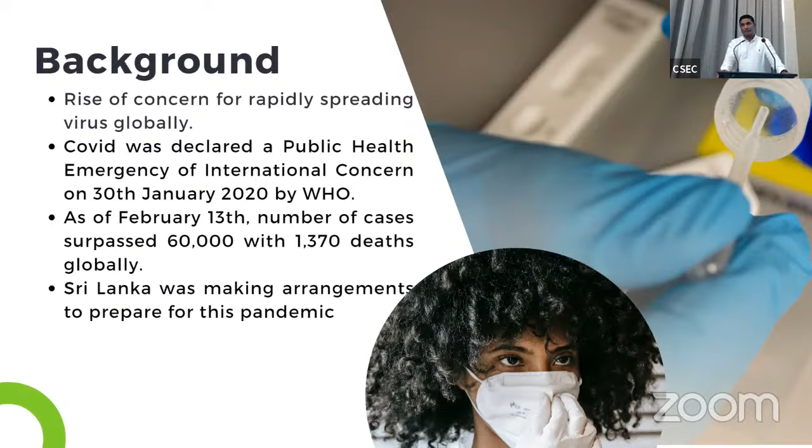So before going to the detail, I would like to give some brief background about the project. Then you will get a better idea of the project subsequently. When I talk about the background of the project, if you can recall your memories to 2020, you know what happened to our country, not only the country, the entire world. We faced the consequences of the pandemic situation due to COVID, and as you remember, all the sectors, including private sectors, collapsed.

Actually, we didn't know what to do, where to go, what to eat and what not to eat, something like that. The instructions came from government sectors and various organizations, but today one, tomorrow different instructions. So basically, almost all the sectors collapsed except the health sector. Fortunately, the government and other relevant organizations like the World Health Organization gave maximum support to our country to manage the situation. So somehow, thanks to our health sector personnel, we managed the situation up to a certain extent. But there is a limit to anything. So the health sector also came to its maximum capacity.

So this was discussed at the highest forum in the country, and the main problem was infrastructure development. They had the medicine and the associated medical equipment, but unfortunately, due to the lack of infrastructure facilities, management was very difficult. As you all know, as per WHO standards, we have to nominate a reference hospital. So in this context, the government nominated the IDH hospital as the reference hospital in Sri Lanka. So all the critical cases and crucial situations were handled by the IDH hospital. But the problem was with the isolation facilities at the IDH hospital.

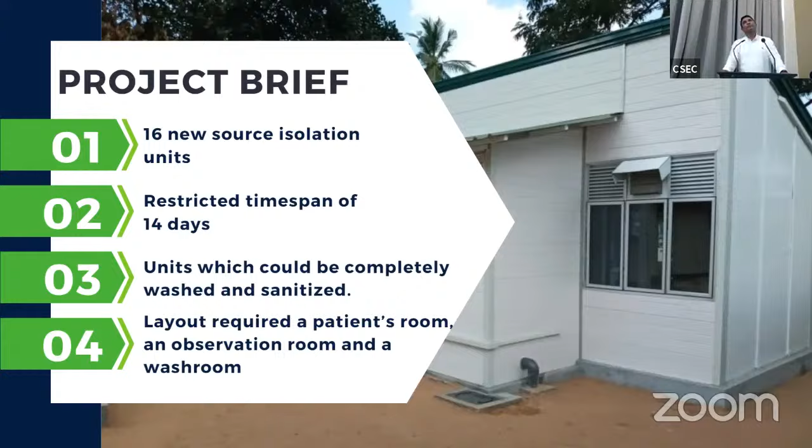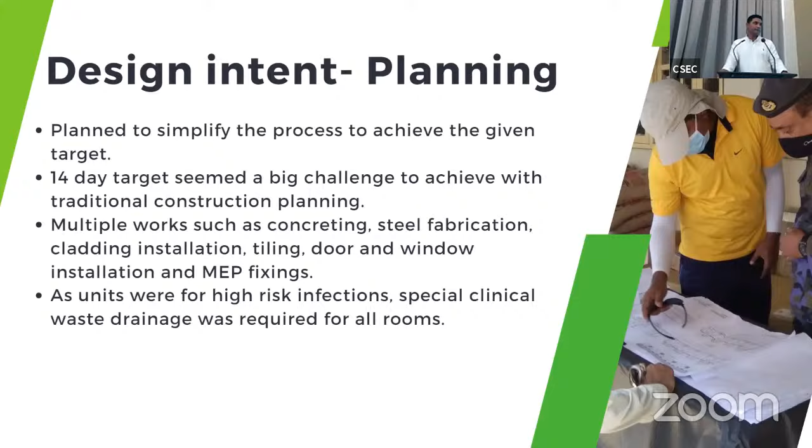But finally, I invited them to come to my design office for the planning of this project. So on the same day, in the evening, the IDH hospital director and other officials from the health department came to my office, and they gave so many proposals, and we evaluated them. We could accommodate all the proposals, but the problem is the time. It's very difficult to construct that facility within 14 days. So finally, we decided to do a composite design for this.

And the other problem is the material. You know, the entire country was in lockdown. We couldn't purchase; even crisis purchases we couldn't do at that time. So then we planned with the available resources within the Air Force, that means the materials available at our stores. So we did a survey. Then we found that we had some remaining components of prefabricated buildings available at our stores.

Then we did a market survey. One of our registered suppliers agreed to give color bonded sheets. That is actually corrosion resistant color bonded sheets, zinc aluminum sheets, imported from Japan for other projects, but he was willing to give them. So now we had some kind of material in our hands. So we tried to accommodate this requirement through composite design, that is basically cement masonry, the cladding and the steel work.

So likewise, we planned our proposal. In this project, the other factor is they need 16 rooms. Each room consists of the patient area, an attached toilet, an inspection, observation and treatment chamber and a corridor. The other thing is it should be washable and sanitized every 24 hours. So the tile floor is a mandatory requirement. It should be washable. And exhaust fans and other associated

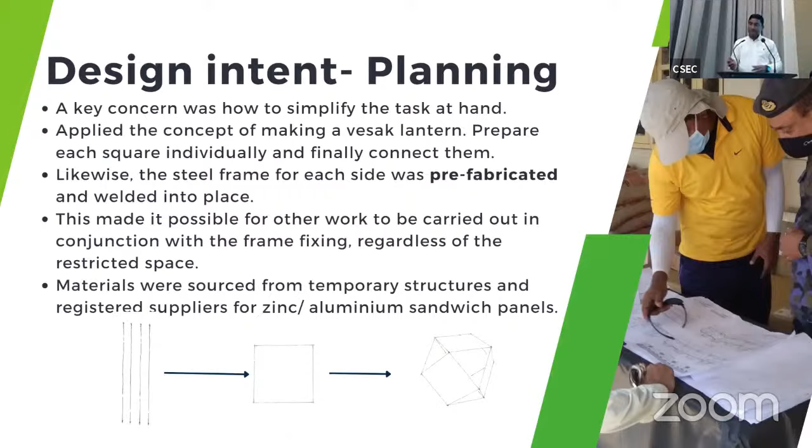So the next step is appointing the project management team and the structure. The project manager is myself. Then I appointed 5 engineers for this task. The first engineer is responsible for site clearance, demolition of the existing building, excavation, and foundation. The second engineer is responsible for prefabrication work and assembly. The third one is material supply and source management. The fourth one, finishing and landscaping. The fifth one, MEP and commissioning of the building.

Actually, this is a very confined and very restricted area. Due to lack of space, we can't build the 16 rooms in a line. So there is a dog leg, and also an abandoned existing building. So first we have to demolish that building. So likewise, we planned. To each engineer, we gave 4 supervisors, 2 safety officers, 2 welfare officers, and skilled manpower according to their tasks, trained under the various disciplines in the civil engineering field.

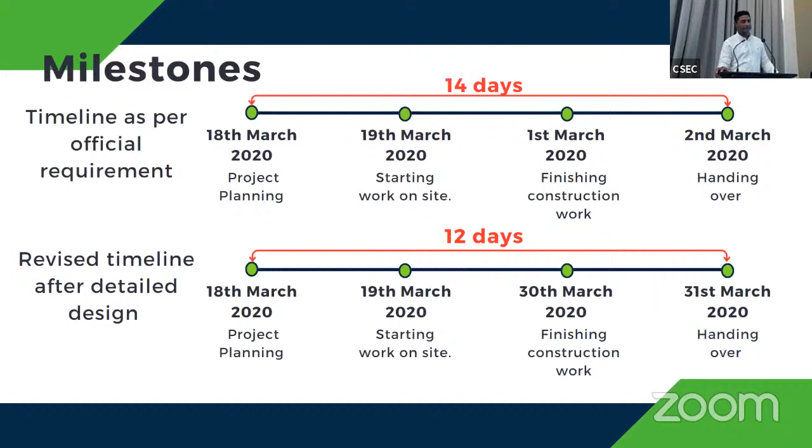So I know that if we plan for 14 days, it will end up with 16 days, with my experience. So again, I discussed with my team and we restricted it to 12 days. We revised the program in 12 days. But somehow, finally, we completed this project within 9 days. You'll be surprised how we did it.

So I would like to tell you how we did it, day by day. The first day, we mobilized. Mobilizing means we shifted approximately 125 people to the site, and we made the temporary shelters, toilets, workshops, kitchen, and storage area. The storage area was also very good because we got a ground. So we erected some temporary shelters for the workshops and storing of items, and other things were stacked in the open ground.

Then we started the first wing on the first day itself: the site clearance and leveling, then setting out of the building, then the excavation and backfilling, foundation and concreting, steel superstructure fabrication, and floor concreting. In parallel, we fabricated many structures, components, and elements in our workshops as well, and transported them to the site, which was under the stores management engineer's responsibility. Then for the second wing, we demolished the existing building, cleared the debris from the site, and started site leveling on the first day.

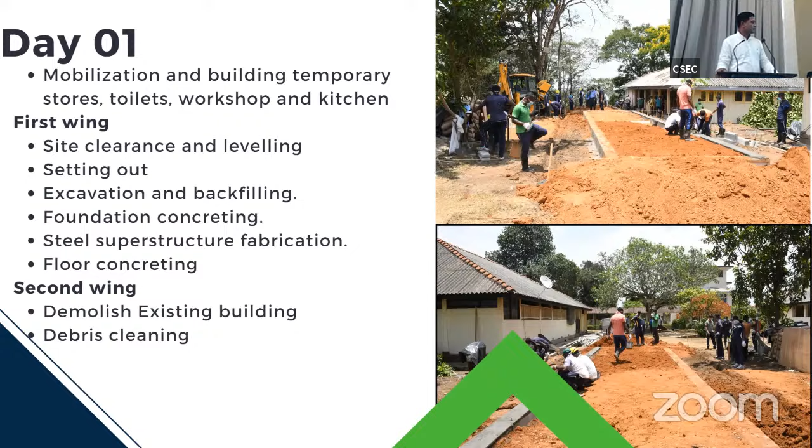These are some of the photographs pertaining to day one. You can see, in the corner one, the concreting of the floor. The following day, at midnight, we did the floor concrete of the first wing.

Then on the second day, in the first wing, we completed the balance floor concreting work and erected the prefabricated steel superstructures. Even while we were doing this, certain items were missing because some elements were still being fabricated at the workshops. So we had to use some jack systems, common sense, and our engineering experience. We just erected that component. You can see in the pictures the concreting is going on, but the steel erection is going on in the same area.

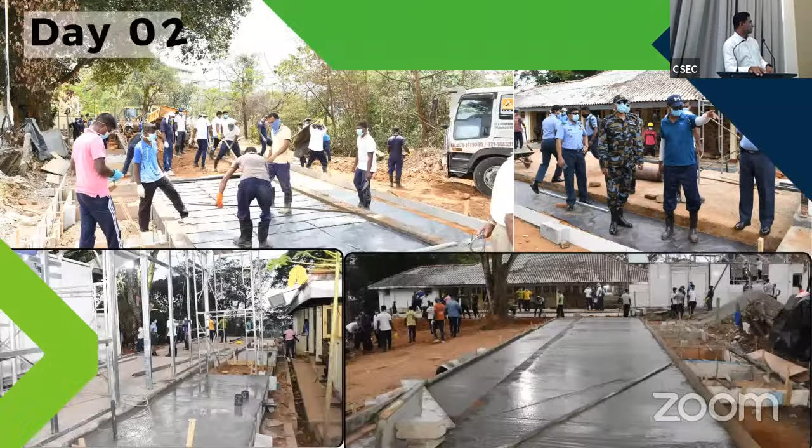And in the second wing, after demolition of that building, we carried out the setting out, excavation and backfilling, foundation and concreting work, steel superstructure prefabrication, and started the floor concreting. So this is day two work. This is the floor concrete going on. Then you can see the erection of the first wing. Some small components are there, but not all, because we just erected the available components only. We were waiting for the balance. That's why you can still identify the shape of the building.

So this is day three work. We started cladding and roof work in the first wing, and the wiring and plumbing also started. And this is a hospital, so the wastewater line and all, we had to do it in a separate way, not like in residential construction. And in the second wing, the balance floor concreting work, erecting of steel superstructure, and cladding installation.

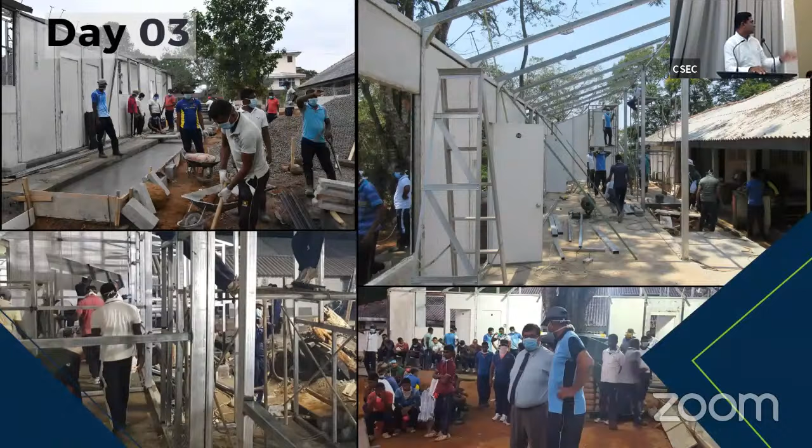In these day three works, you can see how many people worked, right? With a very restricted area. If you really analyze it with the square area, in the bottommost right picture, you can see how many people are there. Maybe it's tea time, refreshment time, but you can see, right? Because we detailed everyone with a task, supervised by the foremen and the supervisors.

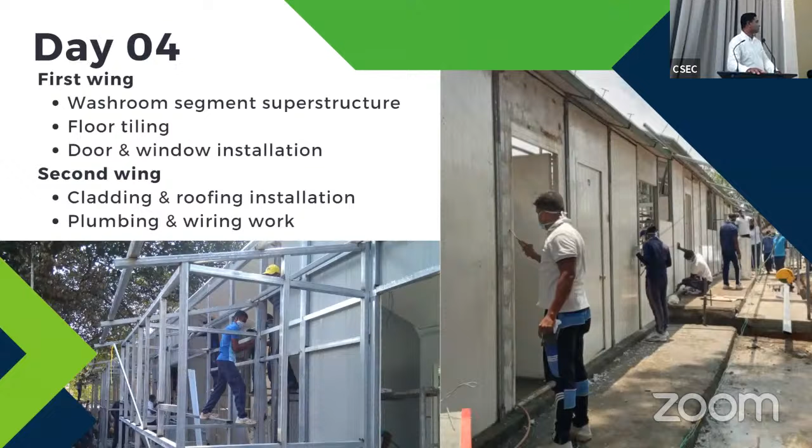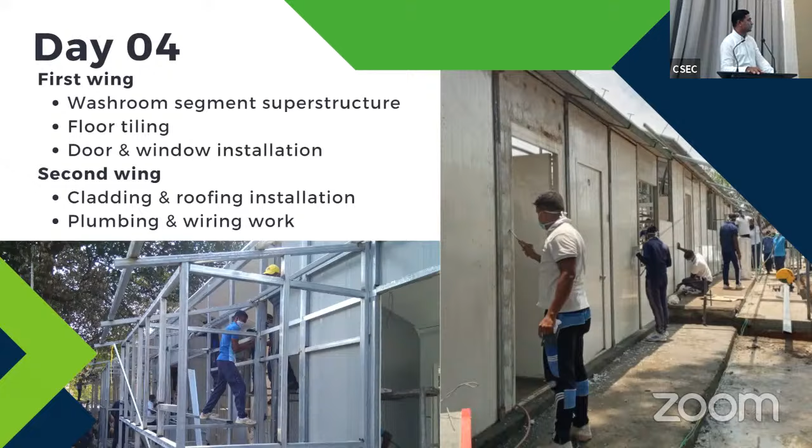This is the day 4 work. On day 4, we started the first wing washroom superstructure. You can see the washroom area in this picture. Then the floor tiling started. We tiled the wet area and the dry area. Then installation of doors and windows. In the second wing, cladding and roofing installation, plumbing and wiring work. So these are some pictures relevant to the day 4 work.

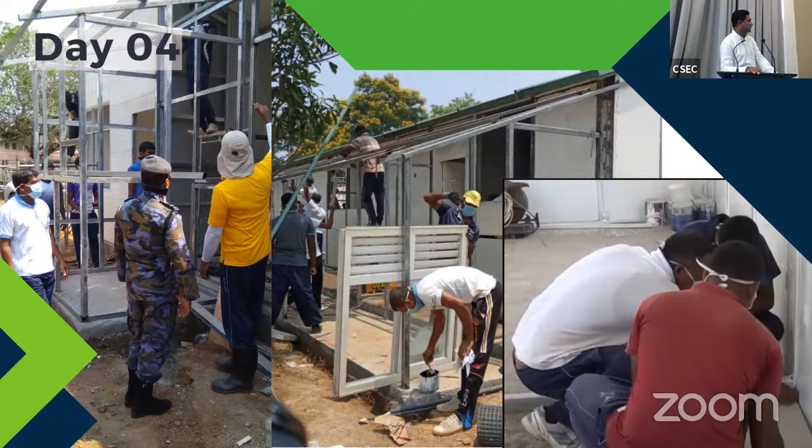This is day 5 work. You can see now the first wing tile floor. As you know, with construction, even in the crucial situation, they also wanted some amendments, some variations, and some modifications. So we entertained that as well as we could. So this is day 5. Day 5 work, the second wing.

So day 6. When it came to day 6, we completed the first wing: the final finishing work, electrical installation, fans, lighting, etc., the nurses' desk, and clearing and landscaping of the surrounding area. The second wing: washroom, cladding and roofing, plumbing connections, and floor tiling. So these are the pictures pertaining to the first wing. You can see the completed building, this is the patients' area, and the bottom one is the landscaping of the first building. For the walls, we had to clad both sides of the steel framework.

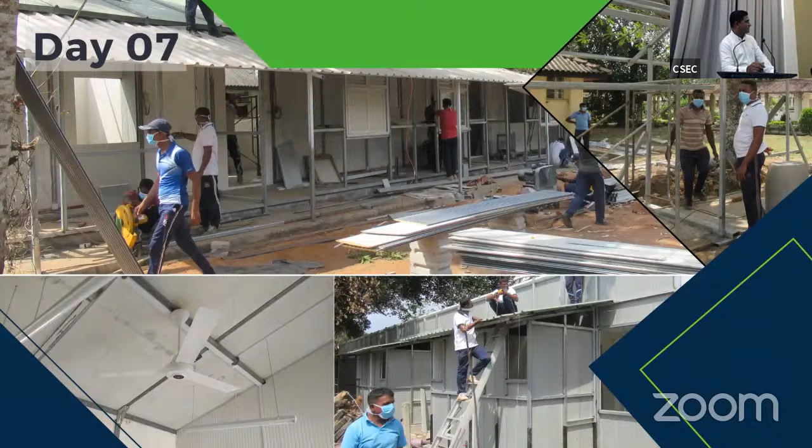When it came to day 7, the first wing was almost completed and the second wing maybe 70% completed, and finishing works started in the second building. You can see the pictures: the access path frame installation, landscaping surroundings, external corridor finishes, second wing, sewer connection finishing.

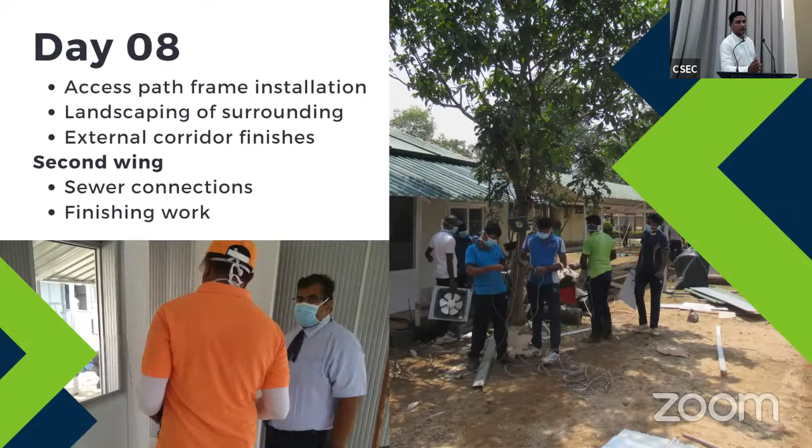and this is a night picture, the bottom one. So that is the finish of day 8. Now the buildings are almost completed. So this is the final day, the 9th day.

External landscaping, testing and commissioning of the building, the site clearance and withdrawal, and also they requested to place a mobile lab there. So that is a container. So again we had to make a structure for that. So we also did the lab and connected it.

Some of the pictures pertaining to this: you can see the washrooms, the cladding completed, everything has been done. So this is the final day, the 9th day. Finally we completed this project within 9 days, and this is the handing over. We invited the commander of the Air Force and the Ministry of Health to hand over this project. They nominated me to hand over as chief guest at that handing over

ceremony. So I handed over the keys to Dr. Wijesinghe for this isolation complex to the IDH hospital. So this is the final finishing work, the final look. Even now you can see the way we did it and how the finishes were. And this is the container mobile lab.

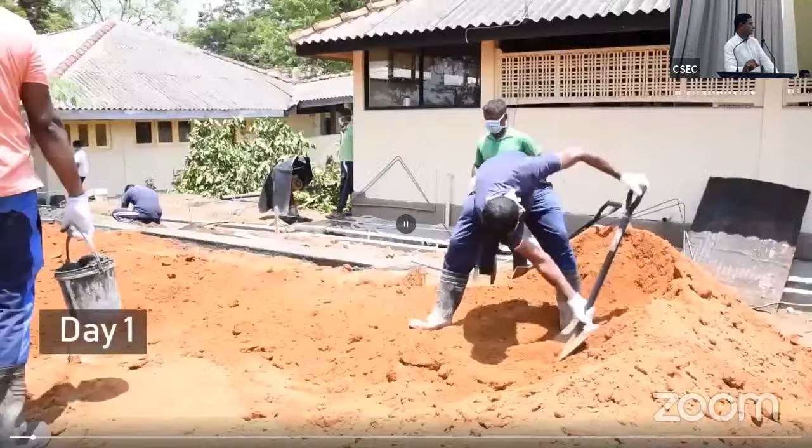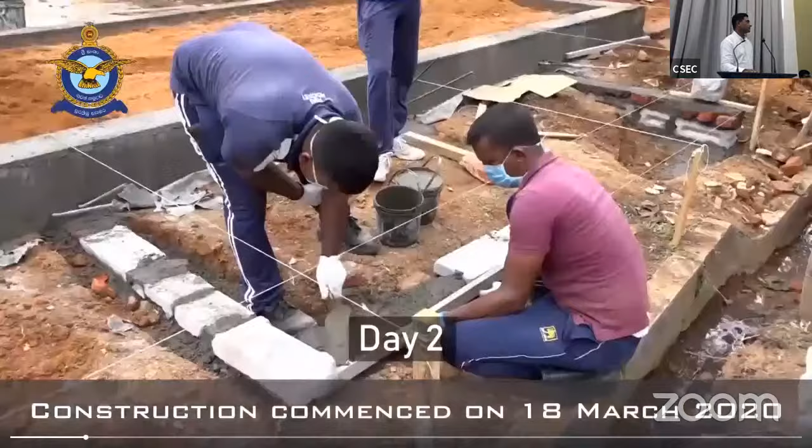So for better understanding, we'll show you a short video clip. Then you can get a proper understanding of how we planned, how we did these 16 rooms. I'd like to invite you all to witness this. You can see how many parallel works are going on at a given time. This is the commander of the Air Force at that time, Air Chief Marshal Sumangala Dias. He personally visited the site, encouraged people, motivated them.

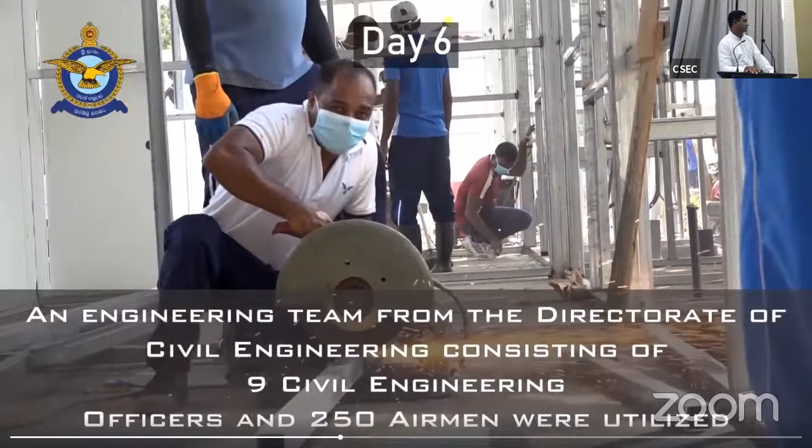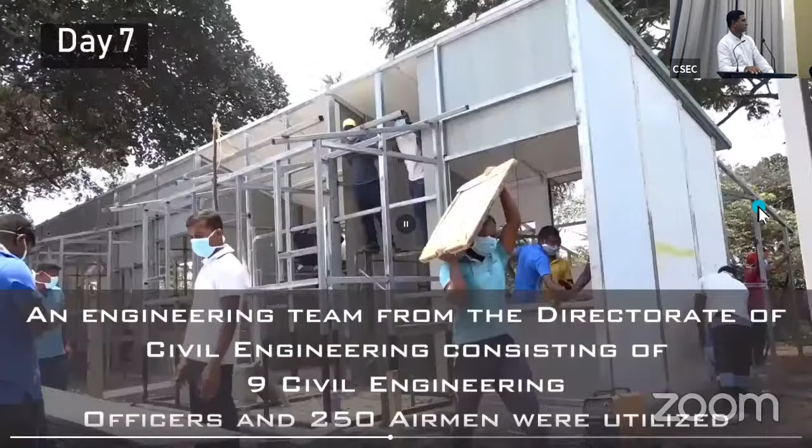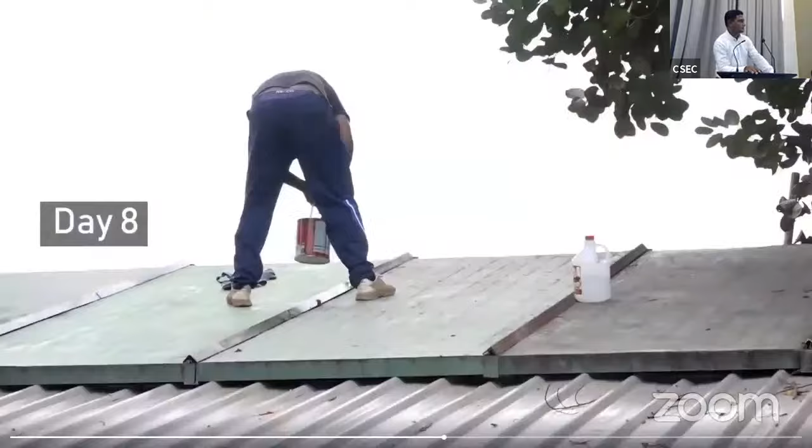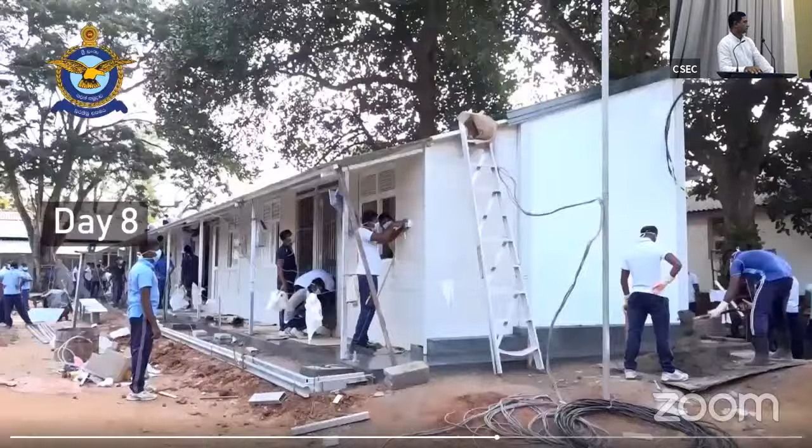So this is the section. You can see the section sizes are different. So we had to manage with the available sections. Maybe over design, maybe under design, but we can't help it. You can see the wires, how many wires are in that, because there are the nurse calls, stations, and all.

So this is the final outlook. The washroom of the patients' area. This is the observation and treatment chamber. This is the handing over.

With that, ladies and gentlemen, we come to the end of this session. Now, if you have any clarifications or questions on this construction, you may ask.

A question from our online participants. One is, how long did the planning and designing take for this project? Less than 12 hours. Less than 12 hours. Because the task was given to the commander maybe around 3:30, as I remember. So we started at 4:30, and we completed all our planning and designing by midnight. And the following day, we mobilized.

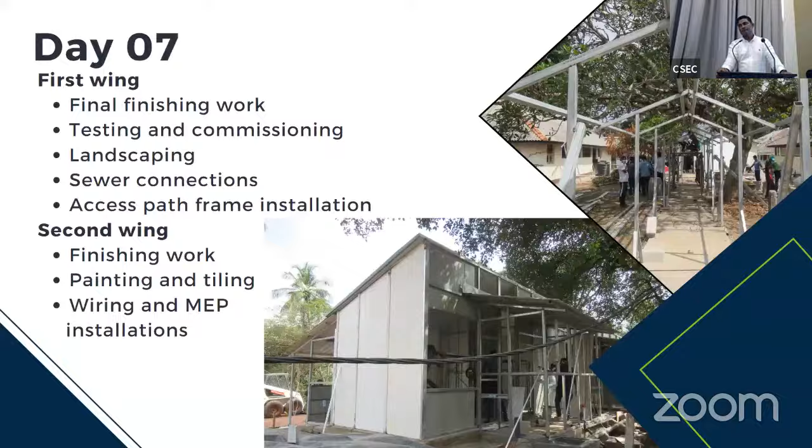Any special type of concrete used to achieve the milestone? Yeah, we used rapid setting concrete for the floors. That's all. Just it. The first wing, 29 meters. As I remember, we calculated we spent about 20 million. Around 20 million.

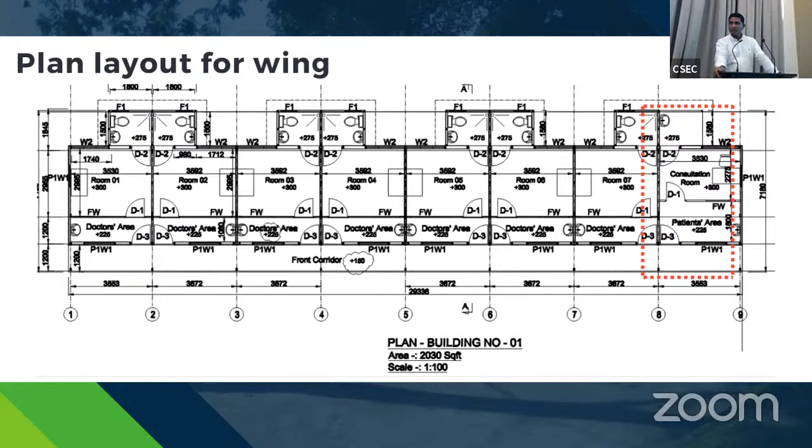No, actually, first we checked the available material at our stores. Our stores are basically at Katunayake. Thankfully at that time we had that material, some components. These are prefabricated buildings for billets we import from China, and the remaining parts. At the same time we consulted our registered suppliers, and they agreed to give. Basically, they are around the Colombo city limits.

We did all the transport because there was no transport at that time. In the services we have a lot of transport facilities and we can manage the situation. So we appointed separate people for collection, identifying the components, then transport, and then proper handing over to the site management, because finally it will come to an audit. All the components should be listed, because we have to hand over the cost and the inventory to the IDH. So like this, we have done all the things.

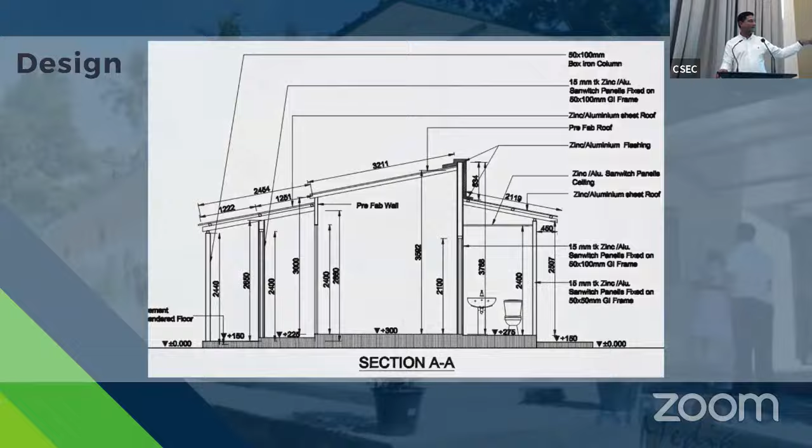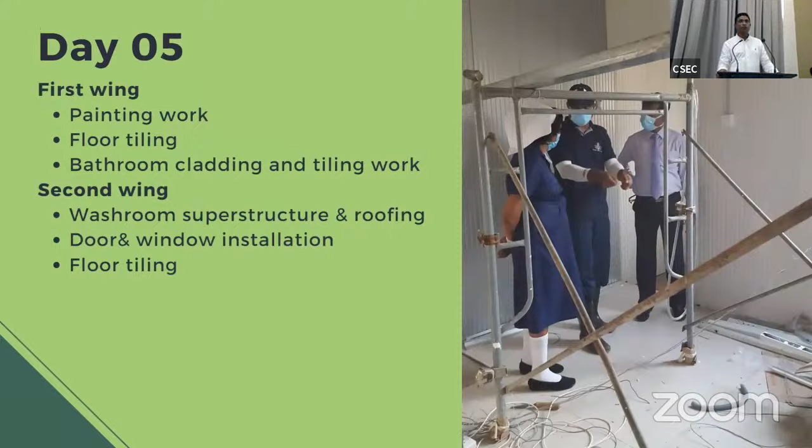You can see we applied anti-corrosive paint in the wet areas. The standard is like that because we maintain it, but cost-wise it's a bit on the high side. So they are applying it. And yes, the furniture and other medical equipment were all supplied by the hospital and even by some donors.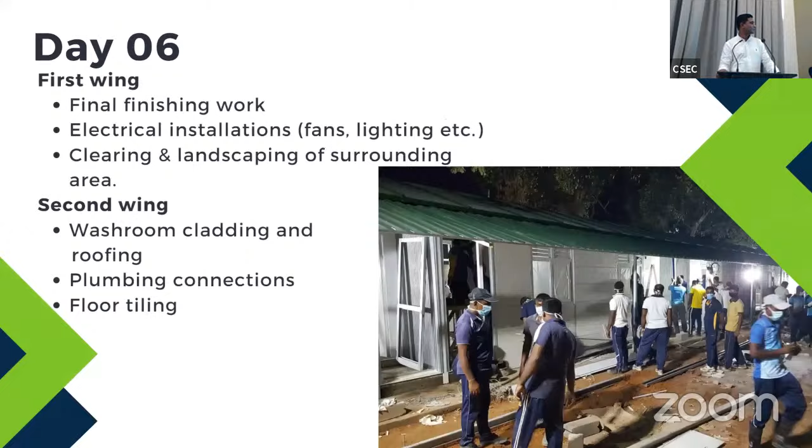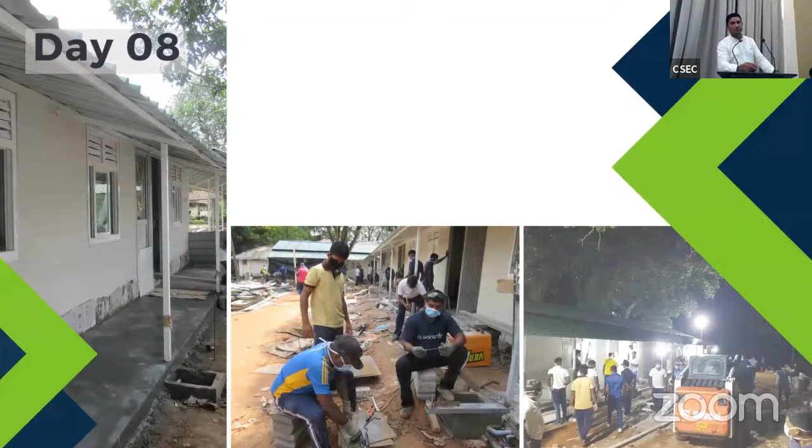My question: were there areas that were identified post completion of the project? Yes, some areas, because actually the observation and the treatment chamber is not enough. According to our calculation, we tried to accommodate a very small area for observation and treatment, because one room consists of the washroom, patient area, and adjoining chamber.

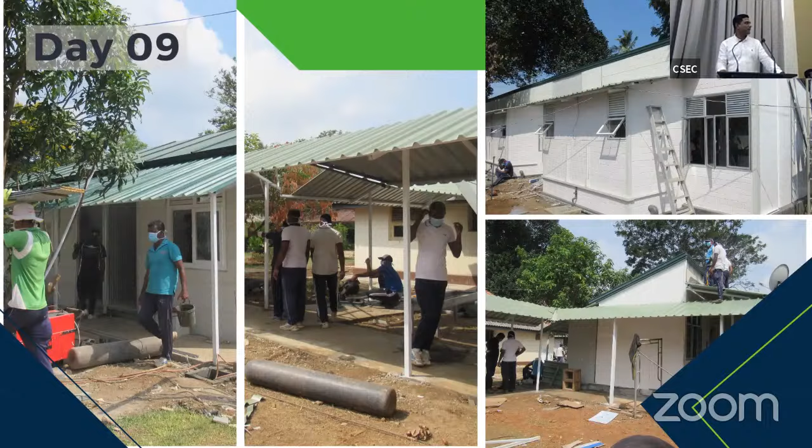So we thought only the doctor will go. So it's a very restricted area. Even the doctor can't handle it within that area. So if you can increase that, yes, it's a better way. But now it's okay for that kind of situation. Doctor needs some assistance. Some equipment is there. Other than that, basically okay.

In case history repeats itself and there's another pandemic, and you want to take on a similar project, are there any improvements you're doing? The answer to that question: yes, we have experience. We have very good experience. We know how to plan this. Even when the pandemic starts, we know that we need source isolation units. According to our population, we know now how to face it. But the only matter is the money.

We can plan now without any problem, for any situation, because it's like a tsunami. Now we can plan for the tsunami. If the tsunami is coming, we know what to do and what not to do.

Pardon? Yes, for the isolation, because that is basically isolation. They need isolation wards. Even before this presentation I contacted Doctor Hasitha Atanayaka, director of IDH hospital, to ask how it is going. They are managing it very well, and he invited me to see it. So one day I have to go and see.